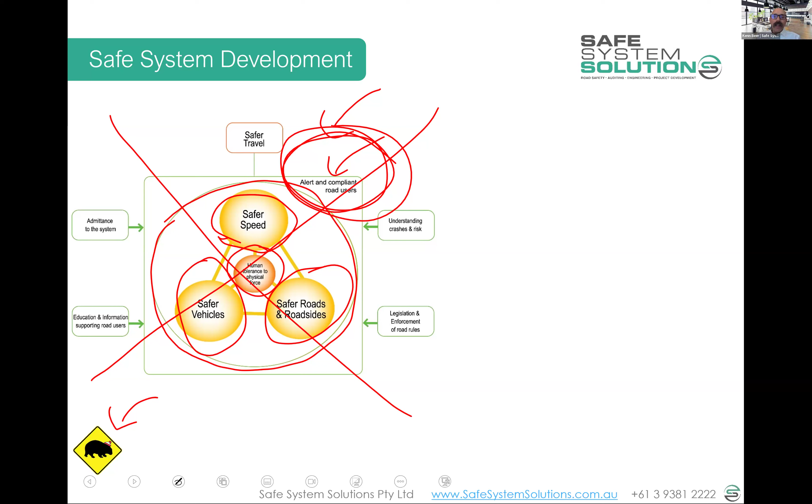That's it. I've done hundreds of fatal crash investigations in depth and serious injury investigations in depth. Every one of them, I can find somebody was not alert or compliant, and that could be used as the reason for that crash and the resulting death and serious injury. I mean, in order for a crash to happen, it has to have something that's gone wrong like that. Okay, very occasionally out there, we see some catastrophic vehicle malfunction or some absolute major road defect that really is the contributing cause. But that's very, very rare.

It's humans stuffing up because that's what we do. You've made mistakes already this morning. I've made many mistakes already this morning, very minor little things, no doubt, and none of them have had major implications. But when you're operating a machine that has this high potential to kill or seriously injure and you make mistakes, unless your system is there to manage all of that, we see horrific consequences at very, very random, sporadic points.

I'll delve into this a little bit more as we go, but I do welcome your questions and comments. I'm talking very philosophical to start this. We'll hone it into road infrastructure design in the next few modules and things. But I need to have this sort of holistic understanding. You can't do a safe system assessment without understanding the principles here.

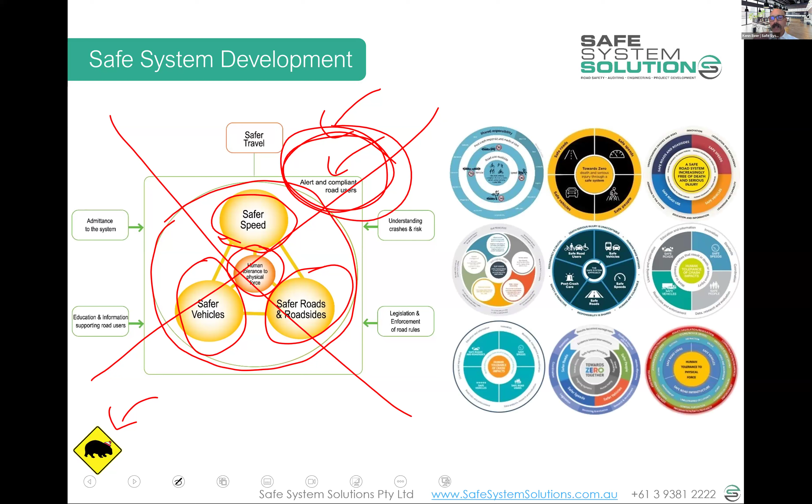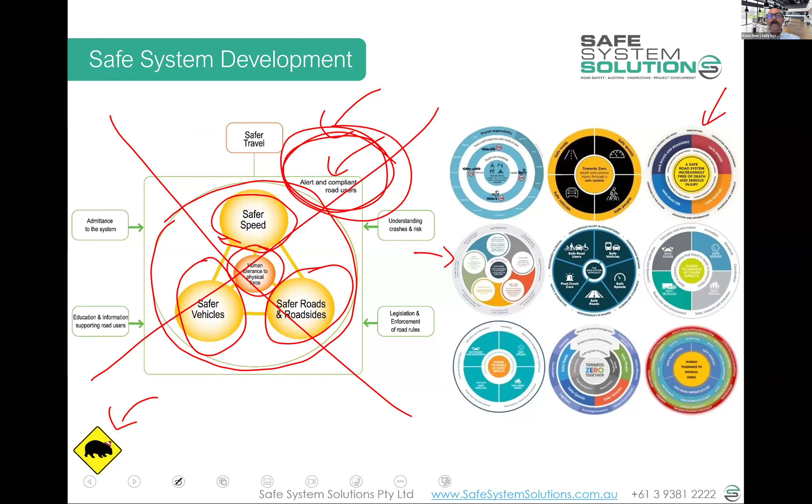Anyway, so that got thrown in the bin as a sort of conceptual diagram of the safe system. And then all sorts of different diagrams started emerging in the jurisdictions across Australia and New Zealand, and then we saw different evolutions of it. Circles seemed to be the go. Everybody jumped on some sort of circular representation. You'll recognize some of the New Zealand ones there from different points in time. You had that one, you're on that one now. And let's just jump into one diagram here. And this is generally what New Zealand is adopting.

I'm a little bit cagey in exactly what I say in that sense with your changing government and what they are currently endorsing and not endorsing. I'm not here to talk about your specific political framework that you're in at the moment. I will just talk to the principle of the safe system and how we apply it. I will happily have some of that discussion later in the session, how we might navigate different governmental changes.

Anyway, let's hone in on this. It's a really elegant way to represent the safe system, and a lot of credit to the New Zealanders. I actually run this course and similar courses across the world. And I do often use this diagram due to a few specific elegant parts of it that I think the New Zealanders have really captured well.

So at the center, we've got the vision, which is a New Zealand where no one is killed or seriously injured in road crashes. Important wording there. It doesn't say a New Zealand where there are no road crashes.

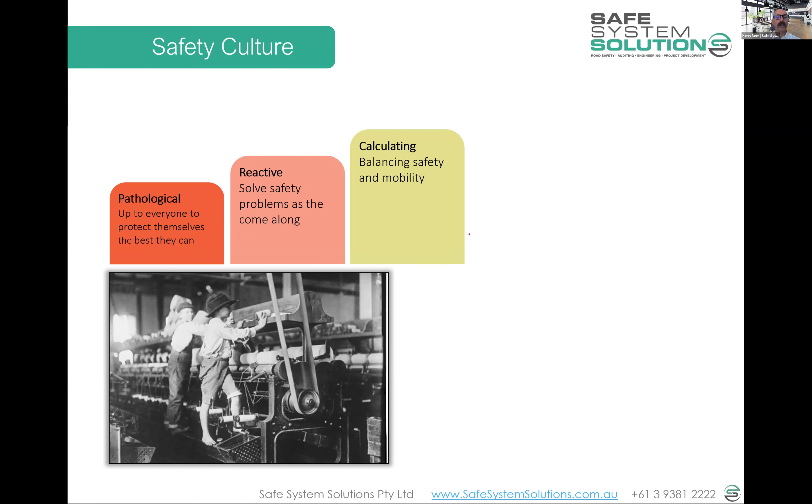So then you elevate from that and you go to this proactive safety culture. And this is where the safe system sits. And it says, we need a very high level of safety, very high level of safety. And we will produce widgets within the envelope of that. If we exceed that envelope of safety, widget production will stop until we get back into that safe envelope. So actually safety sets a precondition for the production of widgets.

And then you have to maintain that. Once you've got a proactive safety culture, you need to continually invest in maintaining not just the equipment and infrastructure and the like. You need to continue to maintain that culture of safety. So when we look at the New Zealand road network, the management, the design, and everything of the New Zealand road network, we see it sits across a number of these safety culture ladder positions.

Absolutely, there's pathological safety culture in there. We give licenses to young drivers. We tell them how dangerous it is out there, and we push responsibility for their safety to them, and then hand them a license and access to a deadly weapon. We are reactive in the sense that we do identify problems and we go and address those black spots, areas of high crashes, crash reduction studies, and the like.

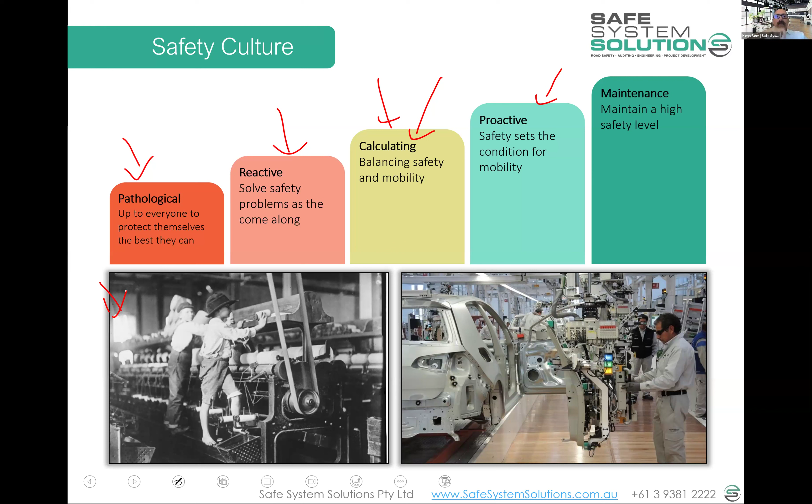at one level above that, it would simply be to say that we treat the road system like a workplace, and the way we look at death and serious injury and risk in the workplace as well. So whichever one of those resonates with you a bit more.

Thank you. Just another question that's come through as well. At what stage is the proactive action too much? The continued barrier system could create more road rage and driving in a cage. Sorry, can you say that again? Yep. At what stage is the proactive action too much? The continued barrier system would or could create more road rage and feeling like driving in a cage.

No, I don't agree with that. That specific example, that's certainly simply a product of having driven on a road network without barrier systems and protection, and not being used to that. Yeah, I mean, we've delved into a specific there, but around the world, those sort of things have been deployed, and people are fine with it.

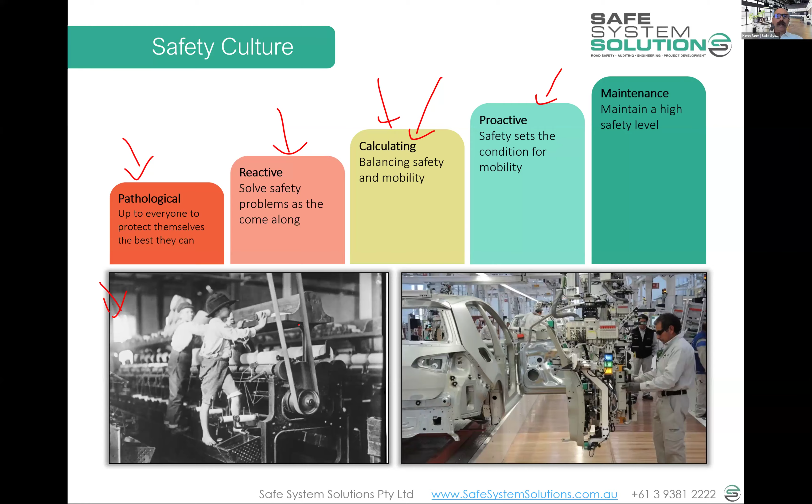And I'm going to give you a little quiz now. I'll talk generally about some principles of the safe system. So I've got a question in there. A poll's about to come up. And then a question I haven't really asked anything about, but it'll be for you to have a guess. Now, you're not marked on these, right? Anything that happens during the live session, you're not marked on. You have a quiz after the live session you're marked on. But let's have a look at that. Hopefully it popped up on your screen. Have a go at answering that. And I've slightly changed the wording, particularly from the New Zealand Standard, to ensure that you're thinking about the principles here. Just 2 questions. We will have a bit more of a break shortly, so you'll be able to fill up your coffee or whatever then.

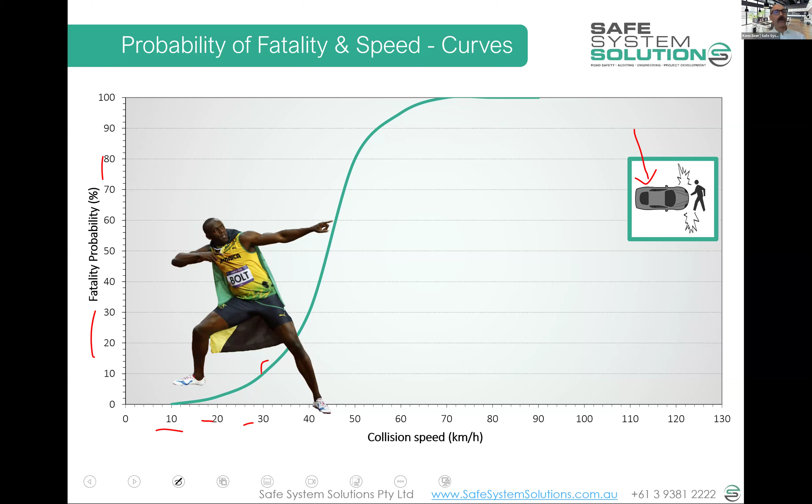Now, Usain Bolt comes in up here, but remember, he's like the Hulk of a human. So this line represents all humans in a community, in the sense of we've got people, very frail old people. We've got young people. We've got people who are tolerating big forces. And you can see that. So vehicles hitting people at all these different speeds, and that's the general curve that comes out for our community.

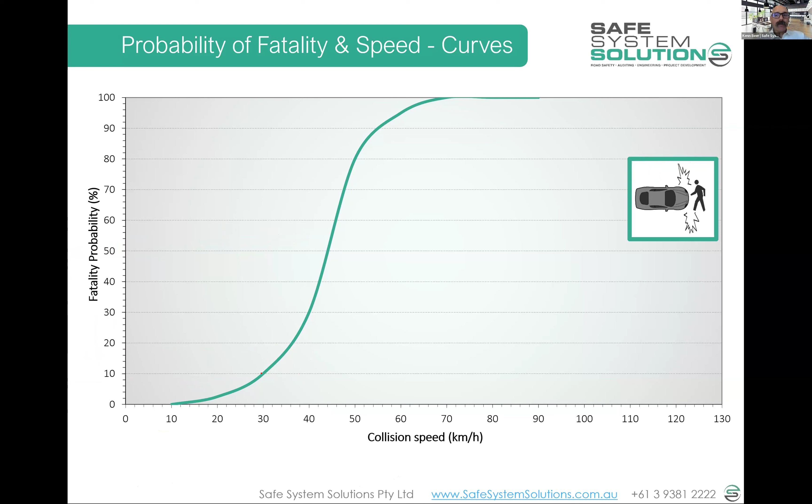We have this for side impact crashes. So this we call the bullet vehicle in a crash scenario. The bullet vehicle striking the target vehicle here in a right angle crash. Target vehicle occupants are going to be the ones that are going to be killed. And we see sort of 30, 40, even 50 kilometers an hour before it starts to go really bad, really quickly.

And we have this for head-on crashes, which is the speed of each vehicle. So when I talk about 70 kilometers per hour here, that's 70 and that's 70, right? So you technically have a closing speed of 140 kilometers an hour. But assuming that they're both the same mass and they hit each other head on like this, we think about the forces imparted on the individual occupants of the vehicles.

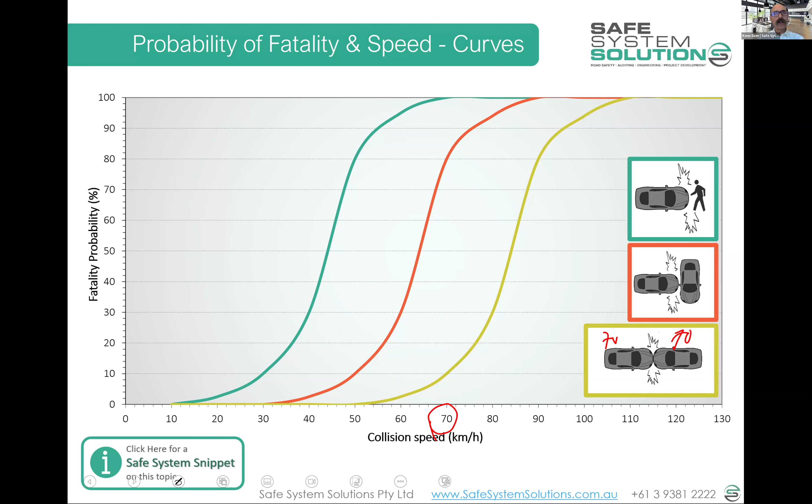So under that scenario, it's a 70 kilometer per hour crash where the human comes in at 70 kilometers an hour and crushes and stops. Okay, so it's the same forces as running into a brick wall at 70 kilometers per hour. There's a good Mythbusters episode on that you could watch, which crashes cars into each other and then into brick walls with accelerometers, and just confirms exactly what I'm saying there. Because there were some people saying, well, the energy of the other vehicles pushing into them.

Anyway. Throughout the course, if you download the PDFs, you'll get these hyperlinks to safe system snippets. Some of these topics we've expanded a little bit on and provided a little more information on our website, and you're able to have a look at that. And there's some videos sometimes.

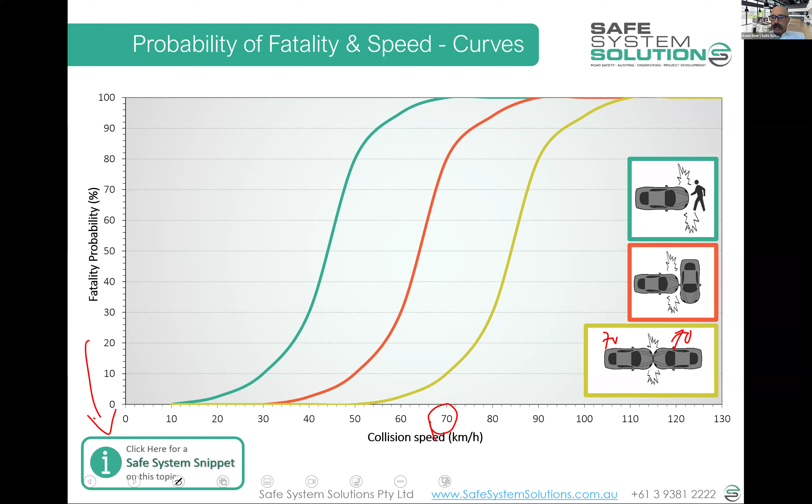Okay. So in a safe system assessment, we'll take questions in a second. In a safe system assessment, we're going to use the biomechanics of injury. And what I've just been talking about there is the biomechanics of injury. We're talking about speeds, we're talking about angles, we're talking about different energy absorbing characteristics. And we need to actually score. We need to score the expected outcome of a crash scenario that we've predicted.

So we can look at a bit of road and predict a crash is going to happen and say, okay, let's estimate how bad this is going to be. And we do that from speed, crash type, road users involved, angles. And this is a little spoiler alert, we will be putting numbers to this between 0 and 4.

And we've given some more crash types, and you'll be able to start to say, well, okay, cyclists getting struck by a vehicle, up here at 80 kilometers an hour, it's very, very bad. Down here at 10 kilometers an hour, it's much, much, much better. And you get a little bit of an indication there.

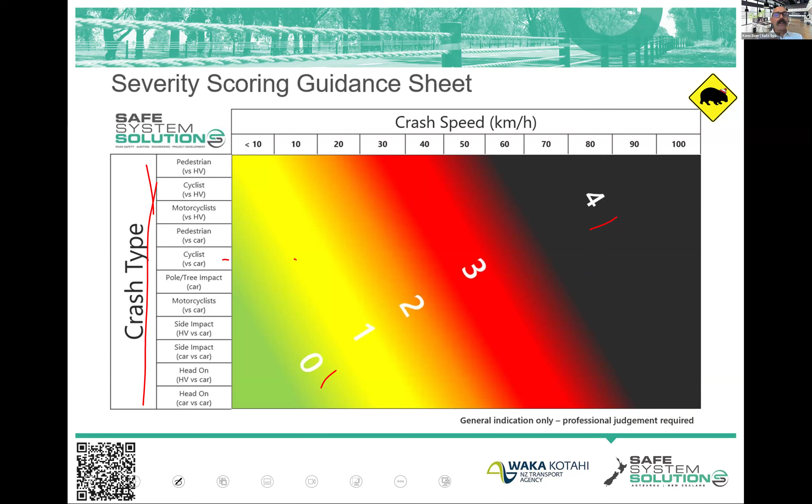We're going to take our break shortly. I'm going to give you a little exercise to do over your break. Actually, before I jump into this traditional thinking, and this diagram is the bane of my existence, by the way. I'm so sick of it appearing in people's presentations, well, I'll explain that shortly. Let's see if Loretta has anything that I need to cover. I think we are all good.

It's just in regards to the green line. The green line for the person. Did we cover that? So I assume it's an adult and children would be lower. The green line diagram, the speed of the vehicle. Yeah, I know the one we're talking about. I'm not going to go back because there's too many slides and it'll just blow people's minds. I'm just going to draw it here. So this was the one for vehicle hitting a pedestrian, right? This is for the entire community. Old people, young people, doesn't matter, right?

So what the actual study was, thousands and thousands of crashes all over the place, right? That is the general trend line you'll see, and that's the trend line that came out of it. So yes, you might have up here an old person killed in a crash that's like 5 kilometers an hour in a car park, struck, killed. You might have these freak incidents on a motorway where somebody's hit at 100 kilometers an hour.

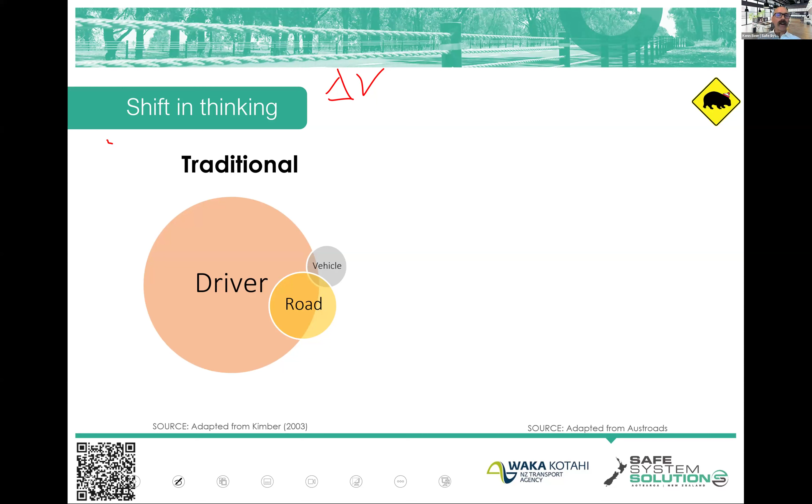Why this diagram absolutely infuriates me is because of what people then take from this. They say, well, the driver's 94% of the cause of crashes. We need to fix the driver. We found the biggest problem. Let's fix it. What we need to understand is that crash causation is not what we are looking at solely. We need to understand, okay, crashes are still going to happen. What's the outcome? Why is our system not protected?

You look at the workplace: individual behavioral deficiencies, mistakes, and the like. It is also 90 to 94% of causation of incidents, but they don't accept that from a system perspective. They say, why did you have a system operating that when that mistake happened, which is obvious, they're going to make mistakes, they're working a shift, why was your system not going to shut down, not going to change? Why didn't you have a guard? All of those sorts of questions come into play.

So we need to say, yeah, of course, humans are going to be 94% of crash causation. Our system needs to pick that up. So this is an Austroads diagram. They had inexperience and driver excess a little bit outside, to say that those are outside of system boundaries, outside of what is expected. So if you have drivers driving 200 kilometers an hour the wrong way down the motorway, that's driver excess, and that's not within our system.

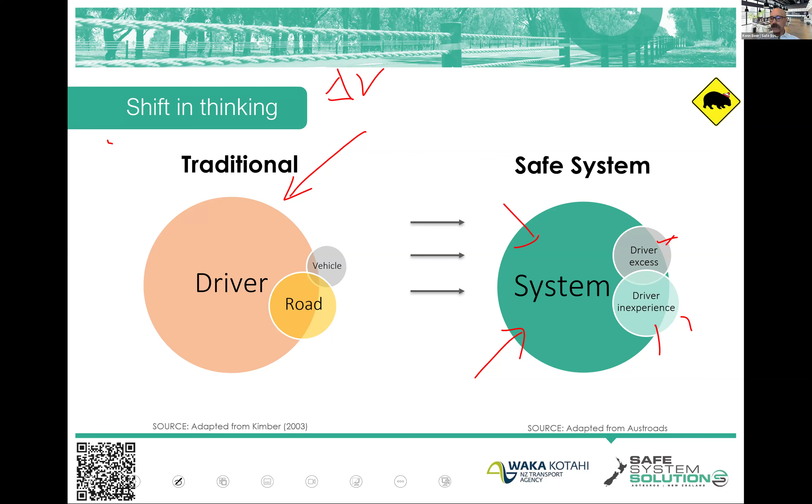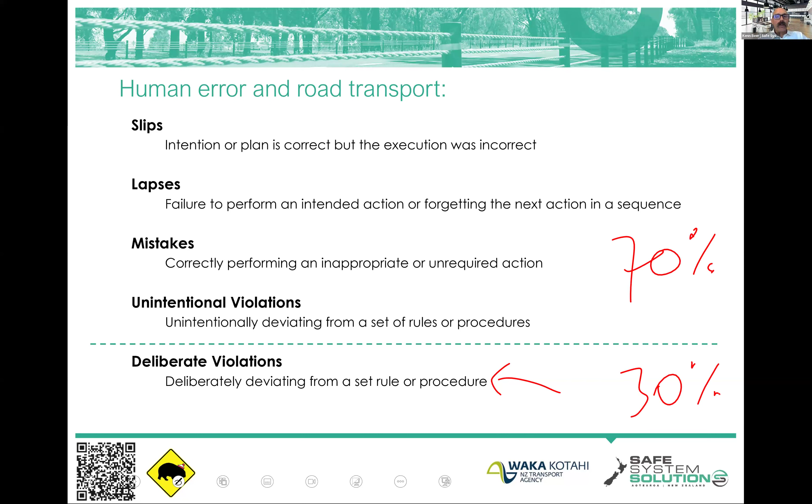And another thing about errors in the road transport system is that people get fixated on this one, and probably the media has absolutely driven this, which is deliberate violations. People actually going out there to hoon, to be the boy racers, they're iced up, and they're doing deliberate violations. But actually, errors come in all forms: slips, lapses, mistakes, unintentional violations. And what we know is that in New Zealand, somewhere around 70% of death and serious injury sits above this line, and about 30% sits below that line. So the bulk of our death and serious injury is people generally trying to go about things in the right way.

Now, this was a Centre for Automotive Safety Research study across Australia and New Zealand. There are very specific definitions of exactly how they landed where the line is. But the general principle is, don't be fooled into thinking the death and serious injuries to our community are all these deliberate violators. That's a massive portion, don't get me wrong. But actually, a lot more is just people going about their general daily business in one form or another.

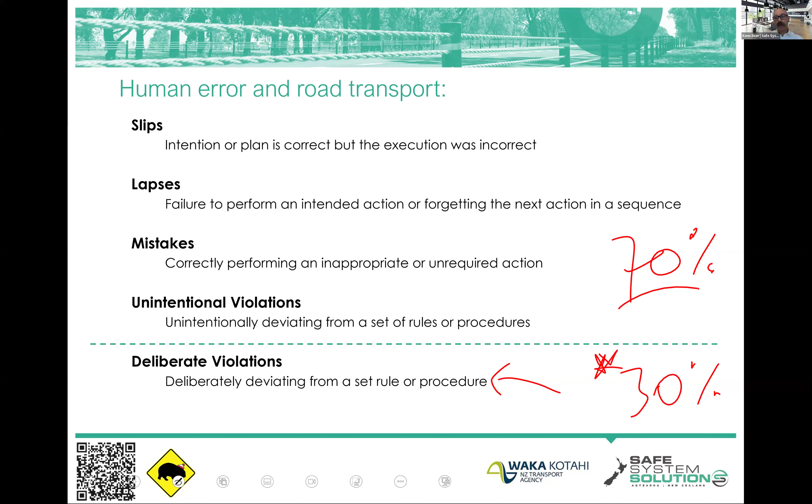Okay, time for you to do a little something. Now, this is where you're going to get a chance to have a stretch and fill your water up, but you're also going to have a little go at this activity. Remember, you're not being marked on it, but shortly a poll will pop up, and you're just going to say, okay, the traditional approach to road safety is here, and the safe system approach is here.

And instead of victim blaming, where we say, well, no, you should have not fallen asleep, or you should have been concentrating, or you shouldn't have missed that stop sign, we're trying to move to another way of thinking, one of these ones. So you just link the two up. As I say, have a go at it. Don't get too stressed about it, because some of them could go to multiple spots, but it's a way to

consolidate our thinking. I'm going to give you 4 minutes to do that, but also have a stretch, fill your coffee up. The poll's popped up on screen. Have a go at that. I'll read the questions and address anything that's come up, but back in 4 minutes.

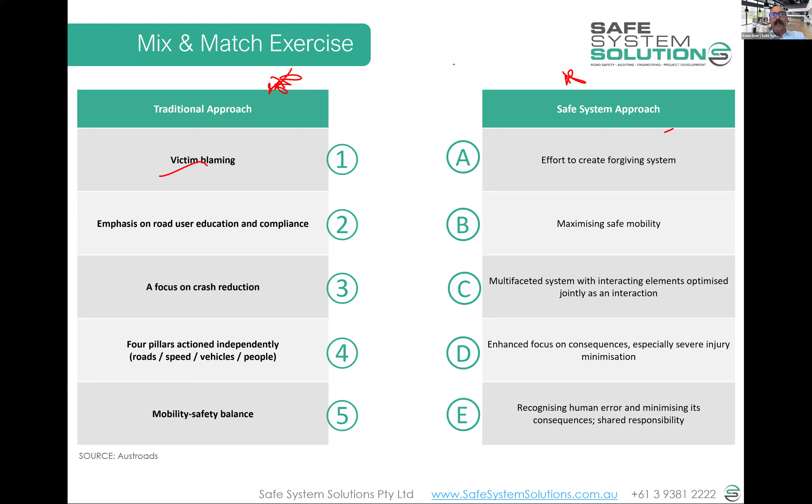Right, let's end that poll and see, most people have had a good go at it, and I might actually stop sharing that. I'll just display it on screen. I've had a quick flick through. Most people have had a good go at it. And let's just have a look on the screen here.

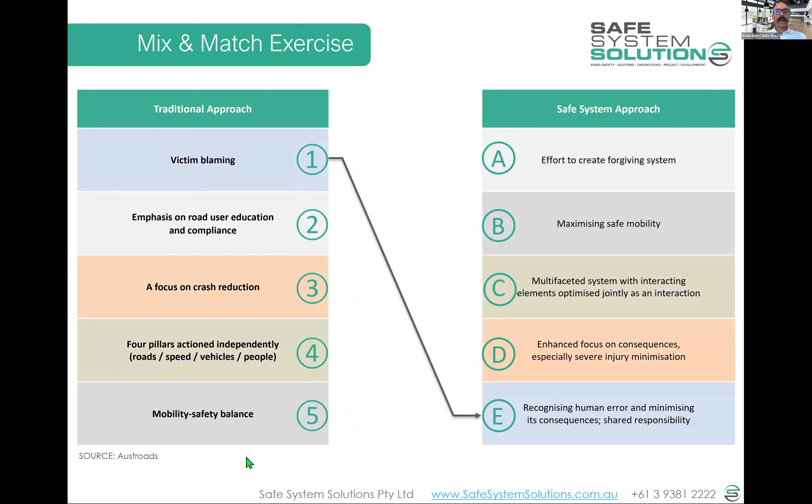So we're really trying to, instead of looking for that particular crash causation, not to say we're going to ignore that, but really understanding that humans make mistakes, and we've got to try and manage the consequence of these mistakes. We've got to try and minimize the mistake making, but understand that. There used to be this sort of focus on education and compliance. We're not going to ignore that, but really understanding the holistic system and a forgiving system.

And what that means is that when mistakes happen, it's forgiving; the forces will not be so much that it'll kill and seriously injure people. So from that focus on reducing crashes to that enhanced focus on the consequence of the crash. 4 pillars sort of acting independently: the roads, the speeds, the vehicles, the people.

Well, now it's this sort of multifaceted system, interacting elements, and mobility safety balance, saying, well, in the past it was what's the appropriate balance between moving people and killing and seriously injuring our community, to saying, no, actually, we've got to get safe, and then we'll move around as much as we can within that envelope.

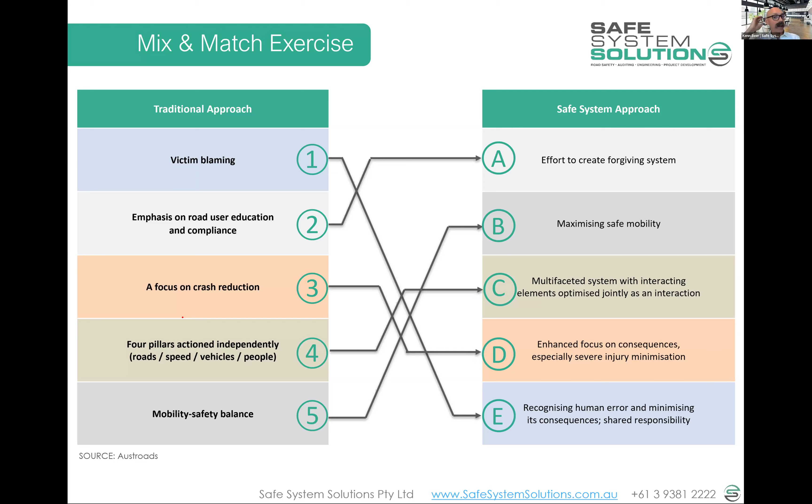Okay. Oh wow, this group is good, Loretta. It's like they've tried to do one of these jobs in the past.

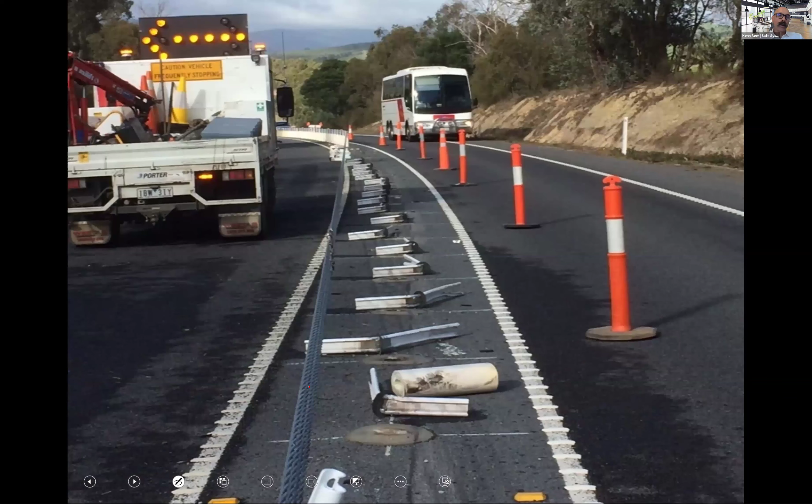Now, of course, it got hit, and as barrier systems do, they're out there to be hit if they need to be hit. This one got hit, and one of the drivers involved in this strike of the barrier system called up the regional office and said, hey, I want to talk to the person who put that barrier system in. And certainly if you've ever been in that situation, you're answering the phone and you think, I'm going to get shouted at here. But they actually just wanted to thank them and say, hey, I think the barrier you put in just saved my life.

And that engineer, it wasn't me, was smart enough to get the comms team and say, hey, I think you should have a chat with this person.

And they created a little video. Now, we put the little video into the learning management system, and Loretta will show you that at the end. But I want you to watch that video because for me, it's a real safe system in action. It's just basically somebody fell asleep. They drifted into the barrier system. Otherwise, they would have drifted straight into another vehicle, and the barrier system just did its job.

Otherwise, well, traditionally, we would be pointing our finger at the person: oh, you shouldn't have driven tired, and oh, we need to educate people on fatigue management and all of that. But rather, the system just kicks in, it minimizes it. Not to say we don't need to continue to work on fatigue management and all of that. I'm just saying you can see where the system just intervened and made it so it's just property damage.

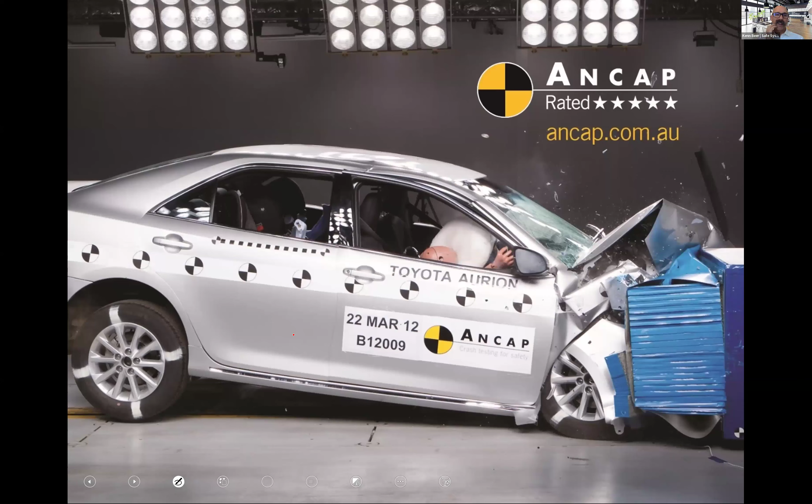I'm going to start just very briefly talking about vehicles and vehicle safety. And I'm not going to spend long on this because in a safe system assessment, which is the purpose of this course, we do a little bit of a look at what is the vehicle fleet, what's out there. But we don't often within a project have much control over the vehicle fleet.

But what we're understanding at a macro level, at a big picture level, is what is the vehicle fleet of New Zealand at the moment? What are the safety features? What are the characteristics of the vehicle fleet? And what happens to that over the next 10 years, next 30 years, next 50 years? And what can we do with our infrastructure to A, make the most of the safety features that exist and are going to exist, and B, not waste our money with infrastructure where the vehicles will solve those problems?

So under Vision Zero modeling approaches, what you do is you start to understand what are the vehicle features that are coming. How long does it take to turn over the whole New Zealand fleet of vehicles, or 95% of it, 98% of it? And then what crashes are being solved by the vehicles of the future? What crashes are not being solved by the vehicles of the future, and we need other interventions to step in? And what happens in that interim?

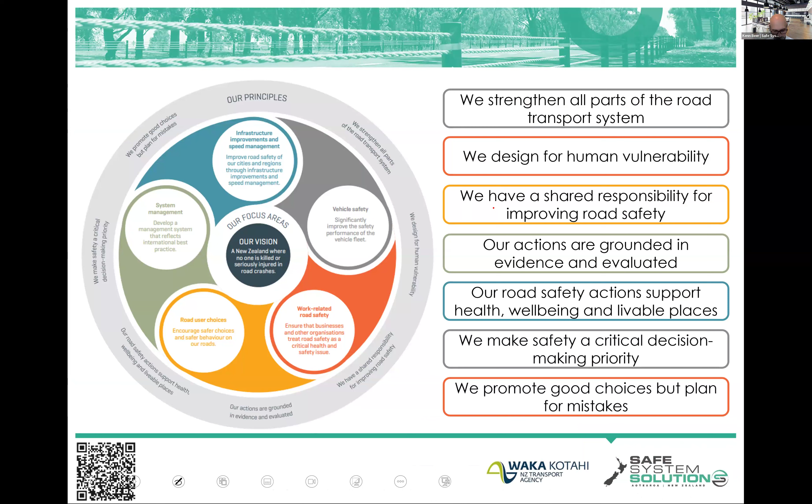I'll see if there's any questions shortly, but I'm going to just very briefly touch on a few more of these elements of the system and give you that sort of high-level understanding. I need to talk about speed and the fundamentals of speed and speed management. I'm really taking you to road safety engineering 101, and it's around speed.

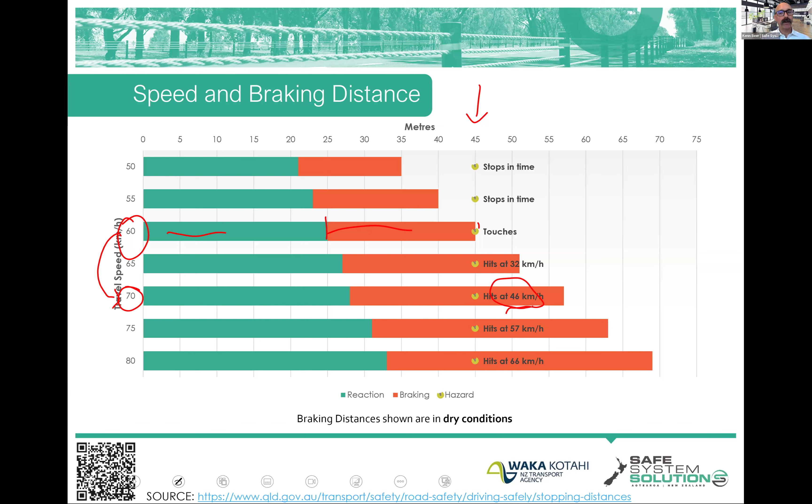Then we have braking, and this is just your physics of braking. It's going to take into account the skid resistance of the surface, whether it's wet or not, and the braking characteristics of the vehicle. And what we see is that at 45 meters, they'll just touch that person. Let's go up now 10 kilometers an hour. Do they hit at 10 kilometers an hour then? No, they hit at 46 kilometers an hour. So it is not a linear relationship. So that's the first thing.

The second thing is the integration of our crash curves into that. So the severity onto humans and a few other specific characteristics lead us to understand that for fatal crashes, we see a fourth power relationship between travel speed and the chance of death. A fourth power relationship means that a small change in travel speed correlates to a large change in the chance of death.

It's a third power relationship for serious injuries. It's actually a second power relationship for all injury crashes. Let me break that down in a simple soundbite, which is that speeds have the most influence on the highest severity crash types out there, and then they lessen down.

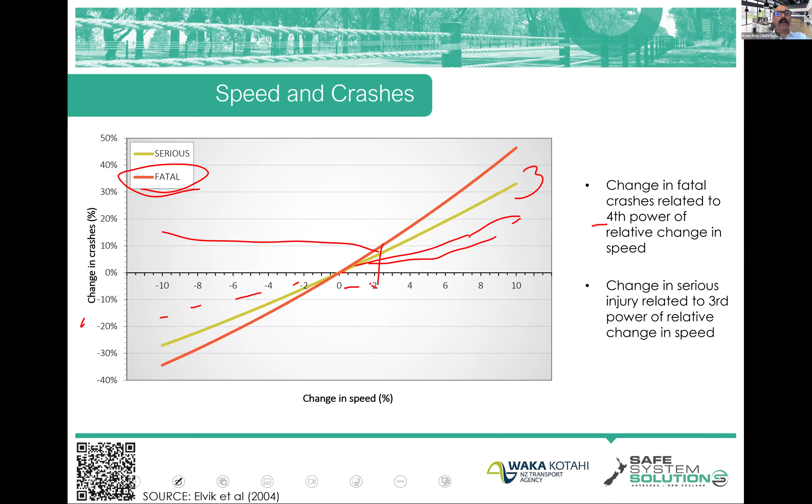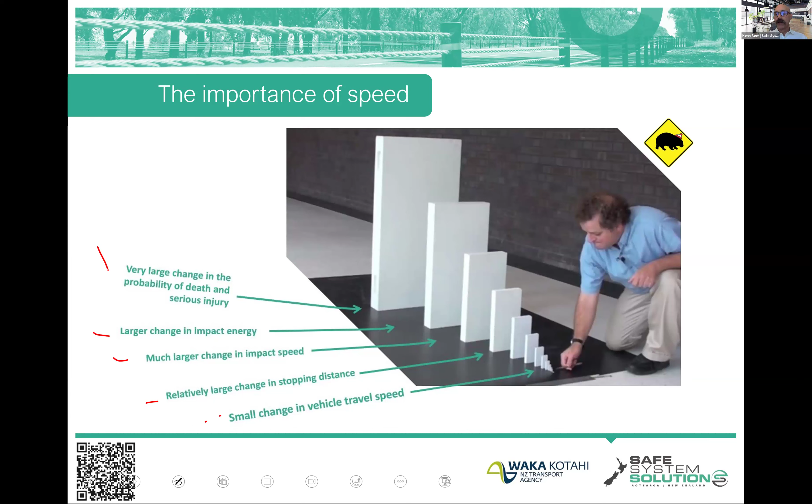But I don't want you to think that the safe system is all about just speed limit reductions. It is applying the appropriate speed to what you have from a vehicle, roads, and road user perspective. I would say that a racetrack is a fairly highly aligned safe system environment. It's got vehicles with really great safety features, road users wearing helmets and restraints, and roads and roadsides designed for speed. Under those scenarios, speeds can be very high and we can still have a safe transport system. So it's about appropriate speeds for the roads and streets and what they have.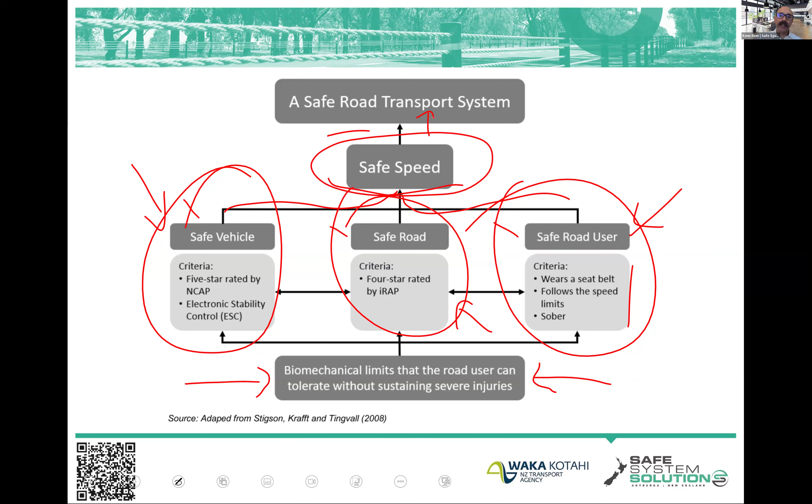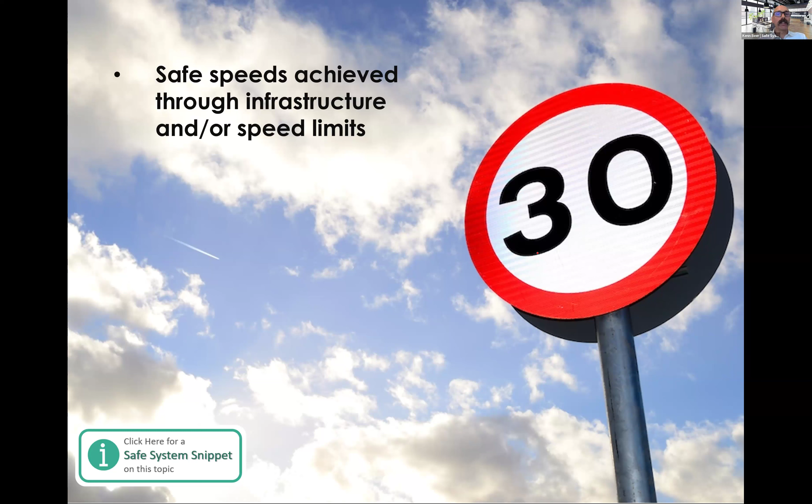I'll take questions after this, but we can achieve safe speeds through infrastructure and/or speed limits. Where you're able to design a road that ensures people go slow, you're in a better scenario because more people comply with it. So local area traffic management features are very effective in ensuring that speed. Speed limits are very impressive in terms of the ability to get general speeds down, so they're hugely beneficial as well.

Explaining why a speed limit is in place can increase acceptance and compliance. And protection of vulnerable road users is generally well accepted. And by vulnerable road users, I mean pedestrians, cyclists, predominantly. Motorcyclists, interesting. They are defined as a vulnerable road user, but they don't have as much general acceptance of a lower speed limit for motorcycle safety. We'll talk about that a little bit more later.

But certainly pedestrians and cyclists. And if you could take the other view of vulnerable, being kids, the elderly and the like, that also really enhances your acceptance of different speed interventions.

Right, Loretta, anything pop up that I need to talk to now? Yes, please. We've got a couple of questions that have come through. Just in regards to the stopping distance. So has the stopping distance reduced over time with vehicle technology enhancement?

So yes, yes, it has. So we're in a funny point in time here where those original braking distances and the like have come down because we've got better braking systems and better tires and better systems like that. Unfortunately, at a holistic level, the reaction time of humans seems to be increasing because there's far more exciting things to do in vehicles than watch the road, it appears. So we kind of balance the two off.

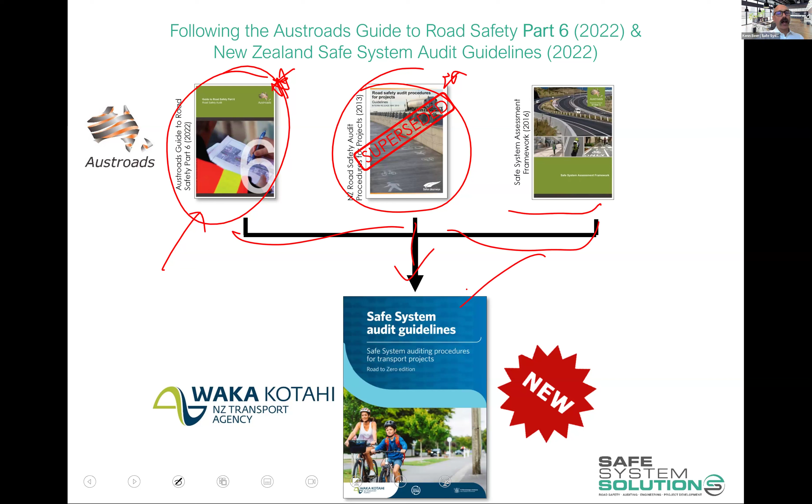And the Safe System Assessment Framework, and combines the best parts of all of these into the Safe System Audit Guidelines. They are available online. Download a copy. We'll put it in the learning management system anyway, so you'll see that. So a safe system audit is a safe system assessment and a road safety audit combined, and you get a little bit of efficiency out of it.

So the first common misunderstanding is that a safe system audit is a check against standards. It is not. Okay, you might be interested in standards and what's being achieved. But no, this is a fundamental look at the project, or the existing road, to understand what will cause death or serious injury to our community here. Doesn't matter if it meets standards or doesn't meet standards. What's going to kill and seriously injure our community? So it's not a standard check, okay?

Even though it's called an audit as such, and if you think about financial audits and those sort of things, they're checking, did you comply with tax code and all of this sort of stuff? No, we're beyond that. We are asking, what is going to cause death and serious injury to our community?

Here's a quick example. This was a death to a heavy vehicle driver. There's a barrier system in place. Everything met standards, but somebody was killed. The barrier system was a test level 3 barrier. It's only designed to really contain a small vehicle, about 2 tons, and it was never going to contain that vehicle. And so could we have thought about that more when we were doing the design? So there's an example of something that met standards, but it resulted in death or serious injury.

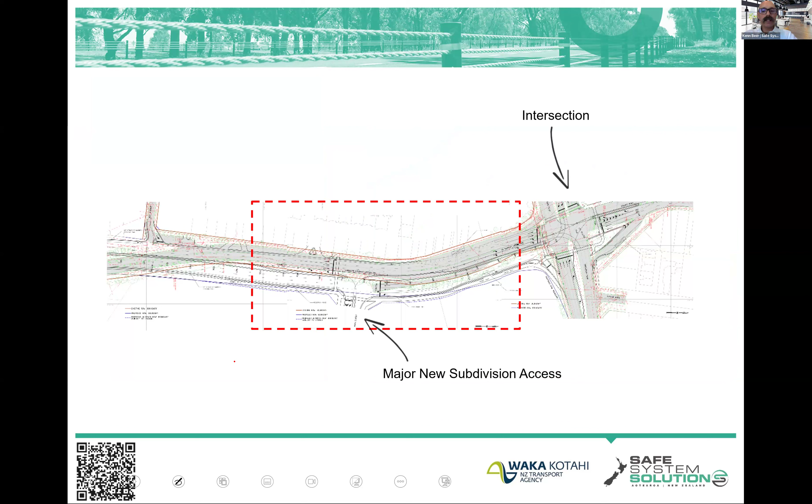Here's another one. Meets standards to a degree, and this is what we call a trap lane. So they're building a new intersection here, and there's another intersection up here, and you can see a vehicle here driving along. Oh, I'm in a right turn lane. That's what we call a trap lane. Now we know we're going to get rear ends and sideswipe crashes here because vehicles driving along don't want to turn. They've just been trapped in that lane and they will get out of it.

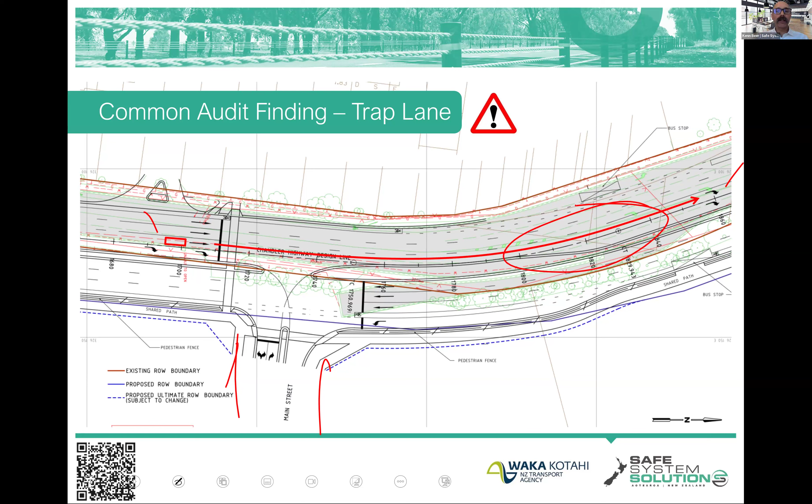Now, this doesn't actually not meet standards as such, because it says we discourage trap lanes, but understands that they can happen. But again, our role is not to be concerned about whether this meets standards or not. It's to say that's a potential issue.

Because we only have a few minutes left, I'm going to jump over this little case study, and we will come back to it if we get time in the next session. It's a good one.

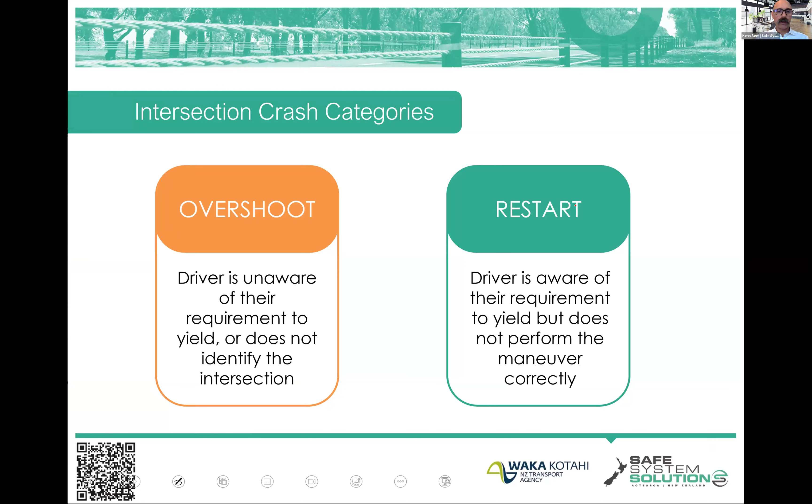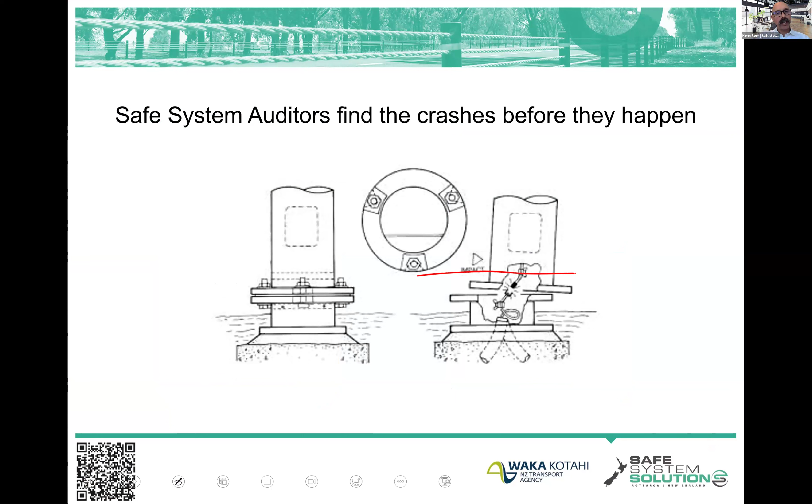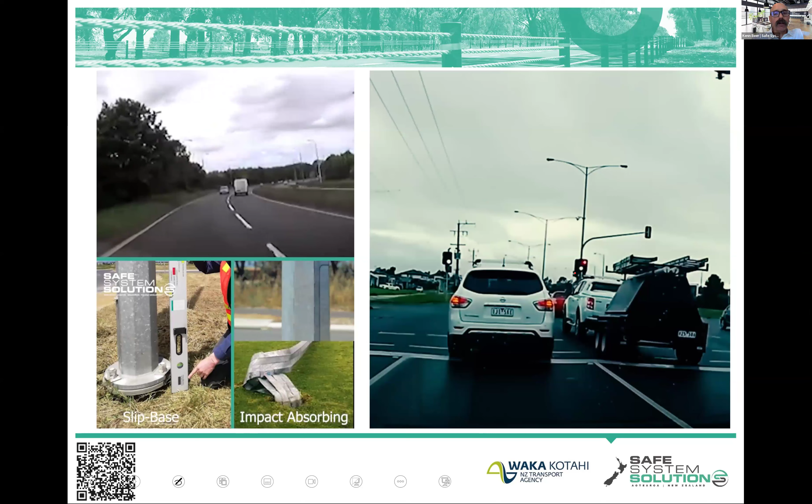And we're going to talk about slip-base poles as an intervention that manages energy. So that's where a vehicle strikes a pole and it shears at the base. And you can see one here from up New Plymouth Way, where it sheared off and it flew a long way. But that's a real example of thinking about the management of energy. A vehicle hitting a rigid pole, all the energy is transferred to the occupant of the vehicle. A slip-base pole will shear off and the injury to the drivers is lessened. And there's a couple of types of impact absorbing poles there, and I've got some videos which I can show you later.

Okay, a safe system assessment. I did jump through a section there, which as I say, I'll come back to if we get time. Safe system assessment and a road safety audit combined into this thing called the safe system audit. And it's a formal, robust technical assessment of a transport project where independent qualified teams audit and they consider the safety of all people. So that's pedestrians, cyclists, motorcyclists, people in wheelchairs, mobility devices, and e-scooters, you name it. Everybody gets thought of. And we apply safe system principles in this assessment.

Now, we can do these safe system audits at various stages of a project. It could be before they build anything. So it could be when they're designing something, planning something, thinking about something: concept stage, preliminary stage, or detailed stage. You can apply this process during construction, although there's some specific things in New Zealand, other ways people look at risk at construction sites. Or you can undertake this after something's been built.

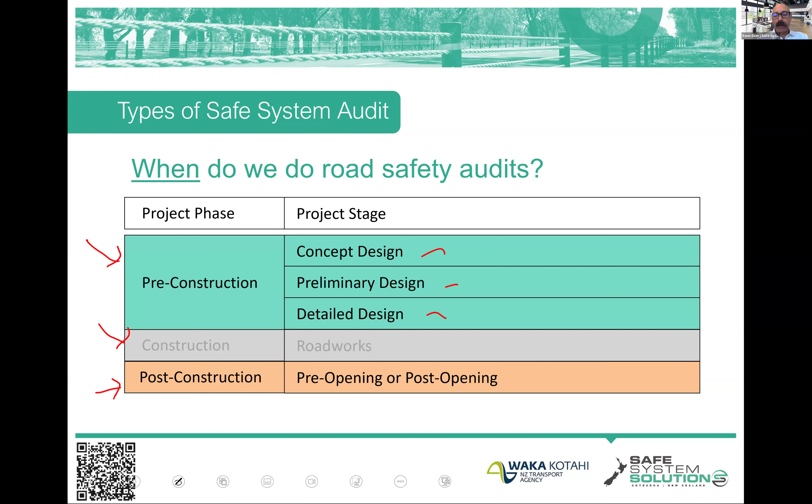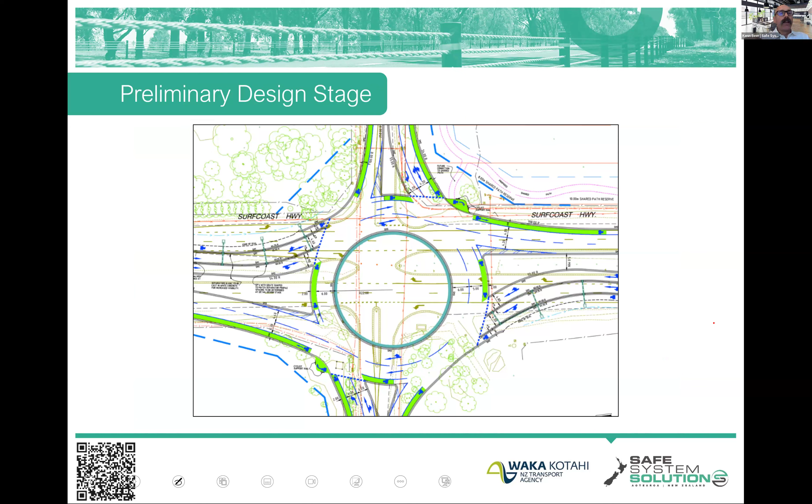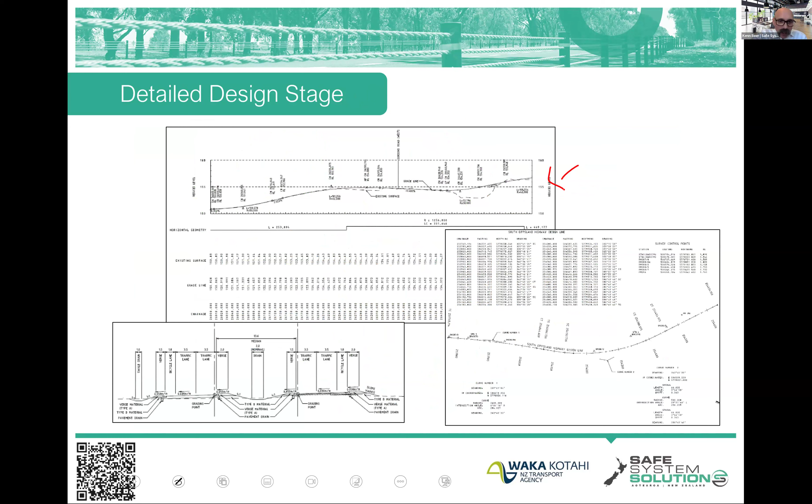The early stages, generally high-level plans, alignments, general information. Then the preliminary stage, we get more in the design. Detailed design, of course, we get a whole lot of technical information. And when you're doing safe system audits at this stage, you want to be in a team with people who can read this sort of information, really understand the technical detail. If you don't have a lot of experience in this, you can still add value. In fact, sometimes you add wonderful value by just asking logical questions, where sometimes the detailed designers are so focused on the specifics that they miss some of the big picture issues.

And thematic audits. This is really where you take one road user group in particular and you really hone in on the specifics of that road user group. So a cyclist audit, you would ride the route and really focus on the cyclist aspects, or pedestrian aspects, or motorcycle aspects, depending. Any safe system audit thinks about the safety of all these road users, but you can take one in particular and really hone in on it.